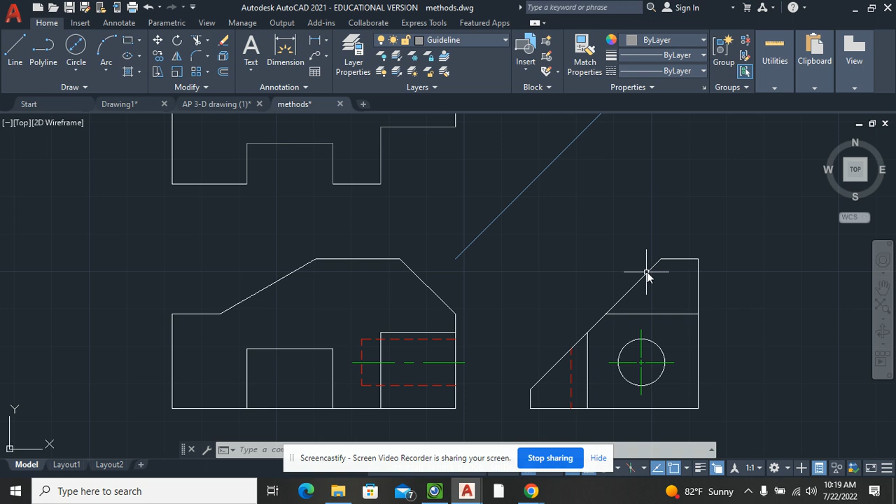Okay, we're going to draw the rod support. I'm going to start drawing a rectangle.

I just saw something after I looked here. It's actually 4.5 inches long. I was about to draw it wrong in the beginning because the holes are a half inch from the end. The holes are 3.5 inches apart, so it's 4.5 inches long and 2.5 inches tall.

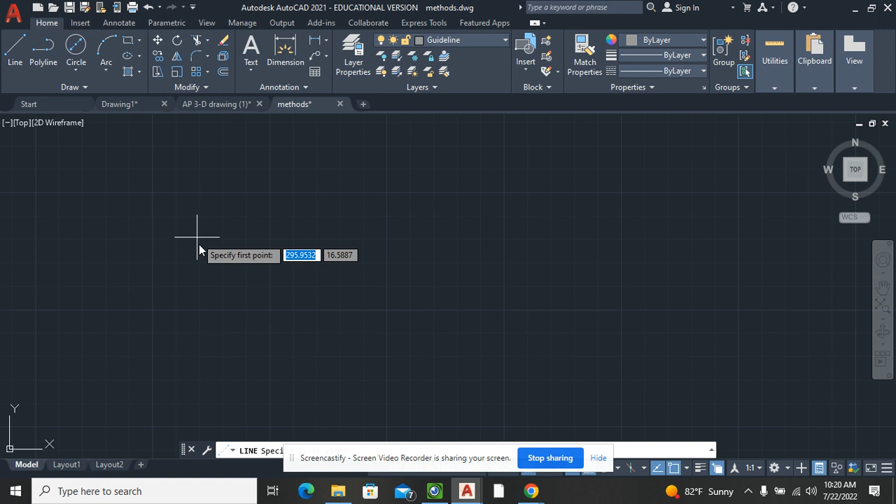So let's draw a line. 4.5, 2.5, 4.5, 4.5, and C for close.

I'm going to start on the right hand side of this. No, I'm not. I'm going to start on the left hand side. Let's start on the left hand side.

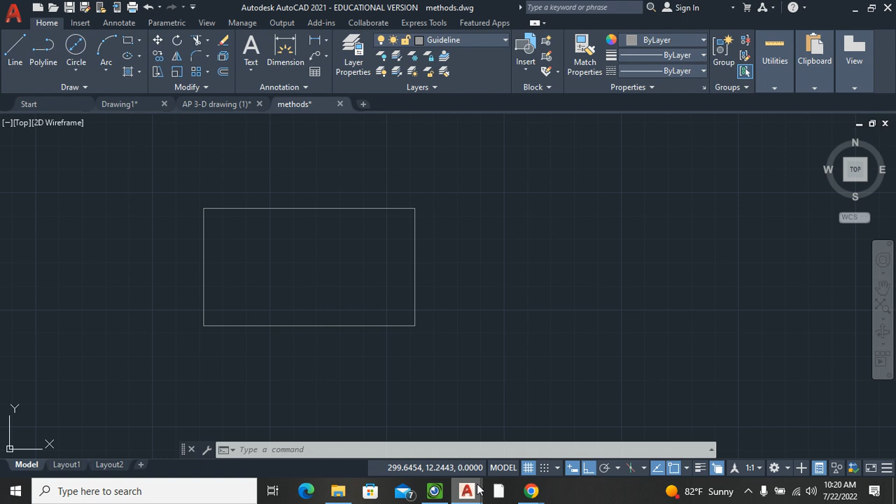We have a 3/8 line, or a line that's going to be 3/8 from the edge because it's got a 3/8, then a 45-degree angle. It's also a half inch tall. Our distance here will be made by starting in the center. So let's start at the center at the top.

This is one of them that wants you to start from all directions. So let's start at center to top. We're going to go a half inch, 3/4, and then down to a half inch from the bottom.

Half inch plus 3/4 will be 1.25 inches. And we're a half inch up. So let's start by offsetting the bottom edge of it. Offset 1/2.

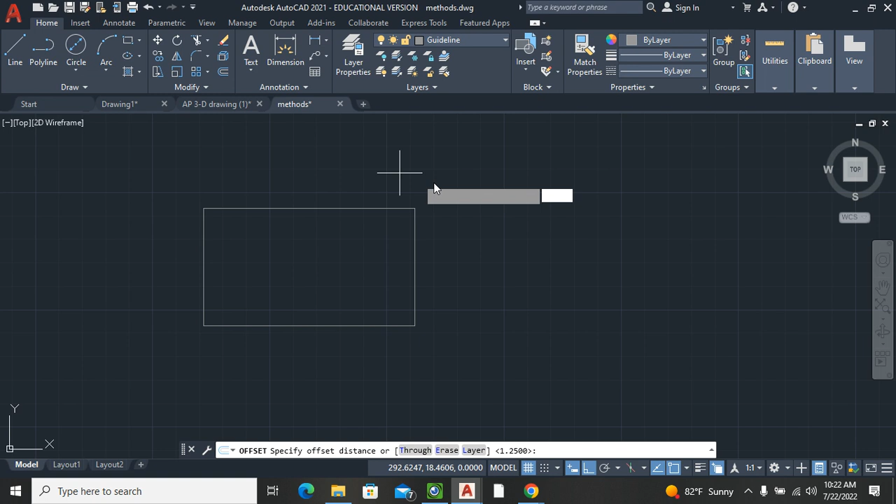I'm starting from the center at the top, and I'm going 1.25 inches, and come down to the. Actually, I can trim this off now.

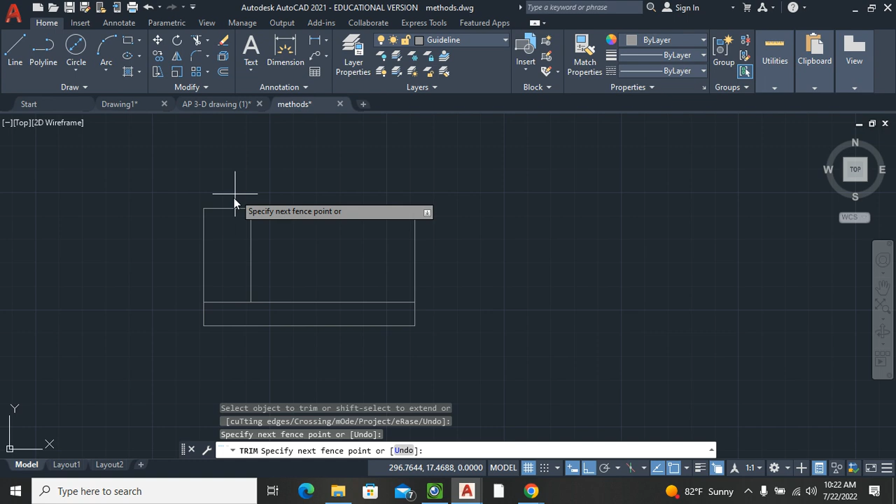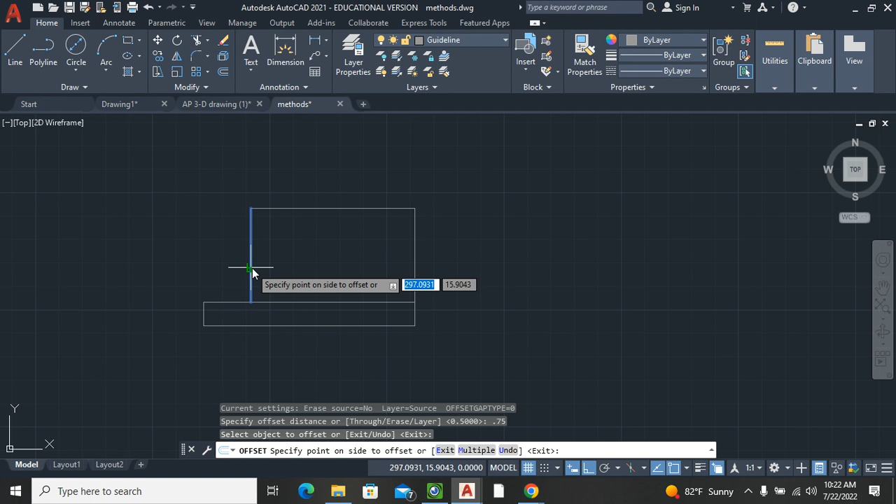It told us that that thickness was 3/4 inch here, so I'm going to offset this line 3/4. I'm going to go ahead and trim this off and this off, save me some confusion. This line does not come all the way down here.

Let's go back to our drawing so we see what I'm looking at. All right, from the center, we have a space here that's 1 3/8. If I convert that into an improper fraction, that is 11/8. To take half of that, I double the denominator, so it's 11/16.

So I can go up 11/16 from the center, over 11/16, and back down, and I have one side of it made.

If I'm drawing from my center, going up 11/16, I'm going this direction 11/16, and back down to perpendicular on the bottom.

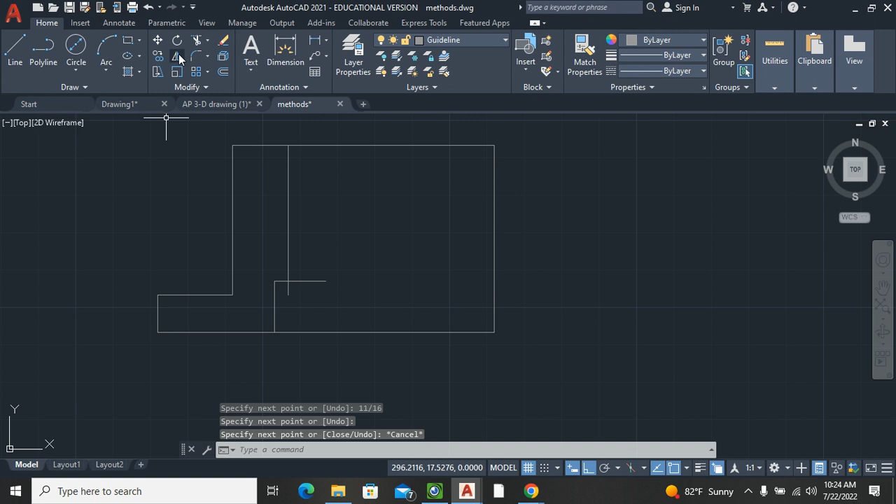Now I can trim this off because I know that's incorrect to be coming all the way down. It tells us that part is 1/2 inch, so I can offset this part that I just made by a half inch.

So I offset 0.5, and trim those two lines. And I have this made from the center.

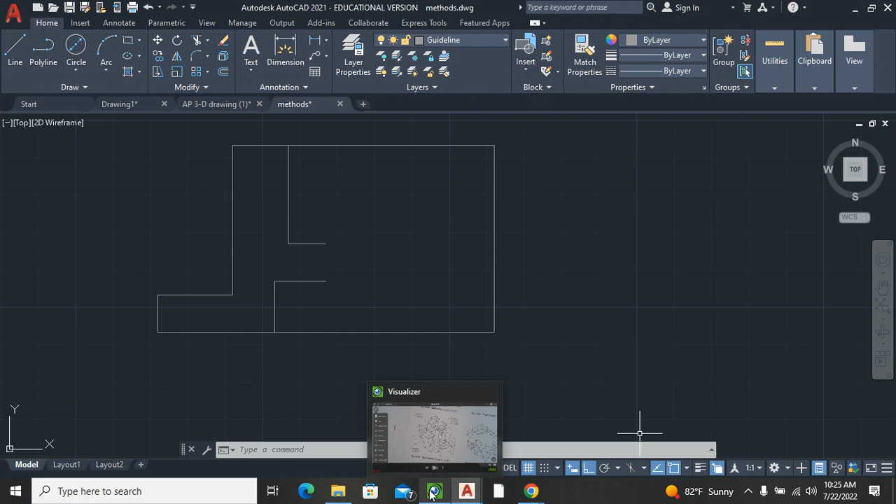Now what I have here, I can mirror. Let's go ahead and put, we said that we had a corner line over here. Let me go to my correct 3/8 from the edge. So let's put a line 3/8 from the edge, and then we'll calculate our drill holes.

Let's wait till on our drill holes. Let's just put that line on there next, and then we'll mirror this and start our side view. 3/8 from the edge. 3/8 from the edge. I'm going to put a line.

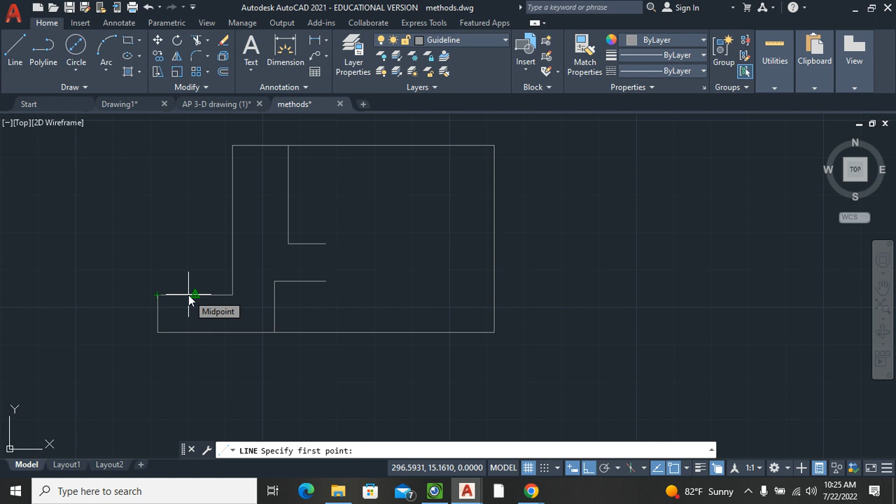And I'm just going to use offset to do that. 0.375. All right, all of this

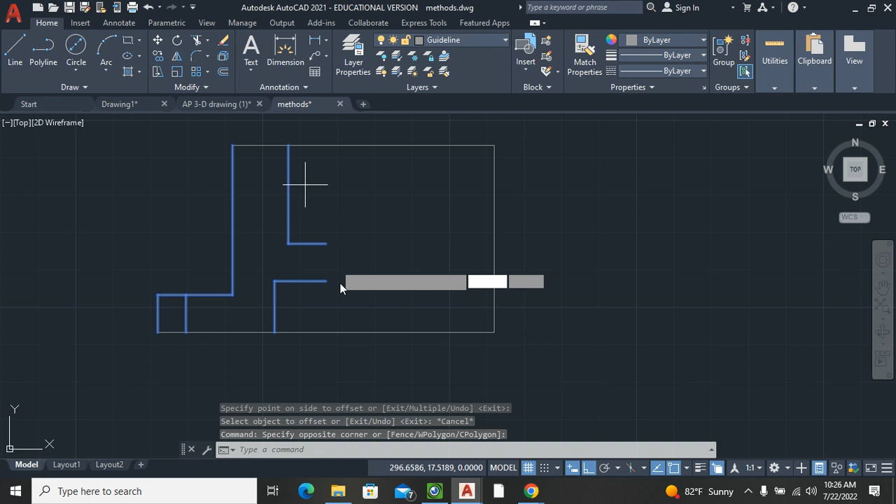I can mirror. And no, I do not want to erase source. Trim here at the top. And I'm going to trim this one off and leave that one because I need it for my miter line.

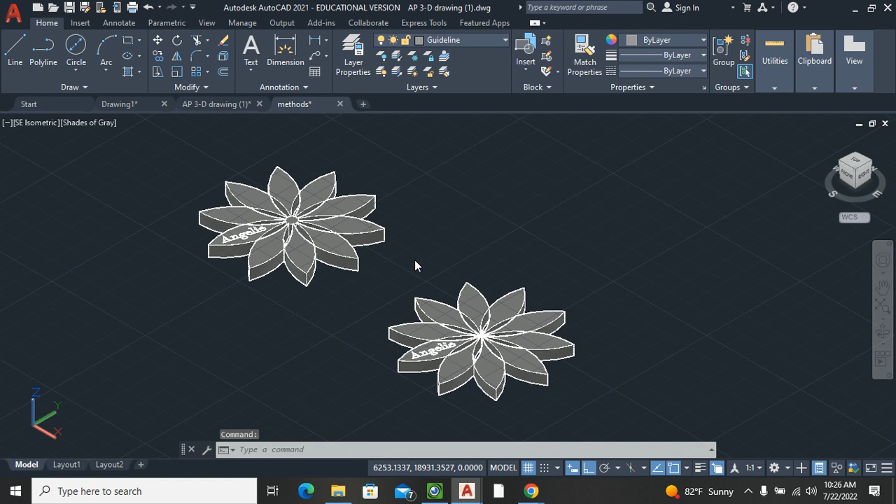All right, I'm going to offset this line. I'm just going to start with drawing a line 1 inch over. Let me look and see what my depth is.

My depth of this object is 1 1/4. And my height was 2.5. Start 1 inch over.

1.25, 2.5, 1.25, and close.

All right, that point we made here is in line with that one. I see something I'm going to change before I go any further. I'm on the wrong layer.

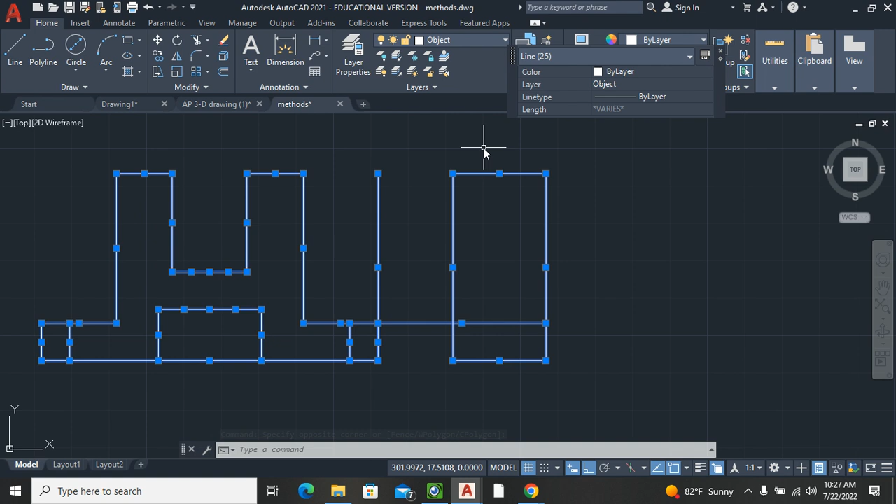And I can trim this off.

We have a drill hole that we can see on this side that is 1 13/16 up from the bottom.

That 5/8 tells me that it's centered this way, so I can start with a center line on the bottom and come up 1 13/16. So I'm just going to draw a line that gives me a point. 1-13/16.

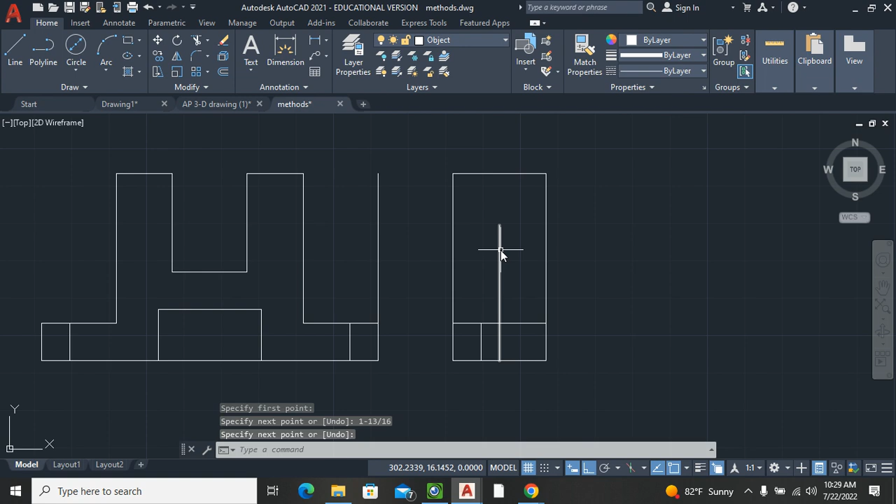And my drill hole size was a 1/2 inch drill, which would be a 1/2 inch diameter. And I can draw that 0.5.

Right, and this next thing I'm going to do throws a lot of students off. It has an arc on the top. Going back to what we learned on tangencies, this has a radius of 1 3/8.

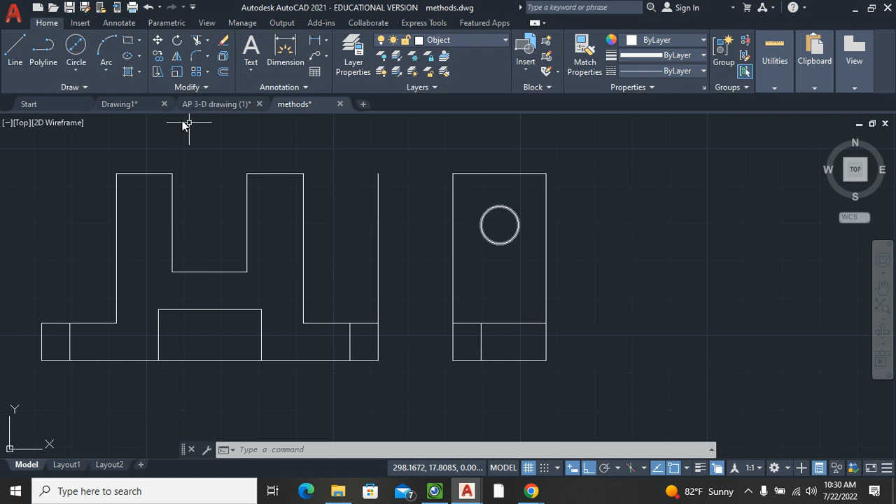That circle that's making that tangency is touching the very top edge. So it has to be 1 3/8. The center has to be 1 3/8 away from that top. So if I draw a line down from my center, 1.375, and now draw a circle with a radius

from that point, 1.375, there it is.

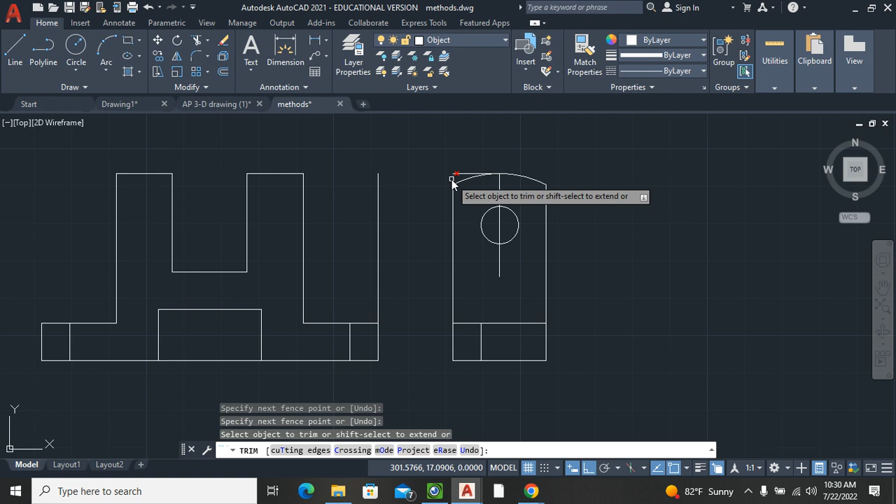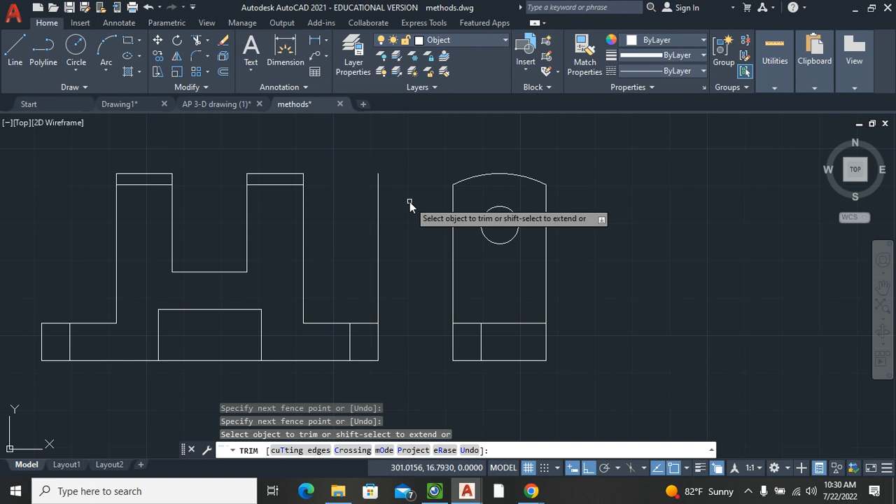All right, now we had points on this one that we didn't put in. So you actually have a line here that we didn't know where they were until we created this view over here.

Where is this and this represented over here? They would be represented by hidden lines. So I'm going to draw a hidden line there, and a hidden line from here.

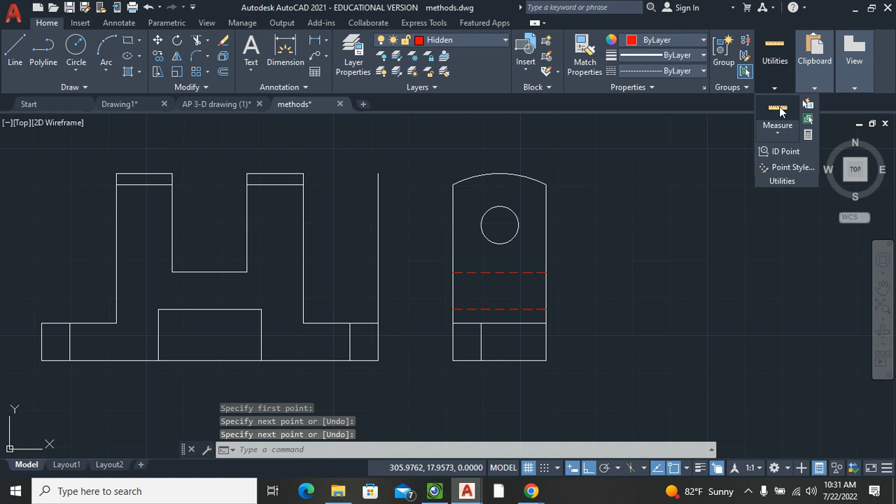I'm going to double check myself on that one, because it clicked on just what I thought it did. That one is incorrect. I'm going to have to draw the line all the way through and trim it because it clicked on endpoints - it was actually not in the right place. So let's trim that now.

And go back and check again. And it is a half inch. Correct. Again, I'm going to wait on those drill holes for now, wait till we do the top view. What else? Is anything else missing on that right now?

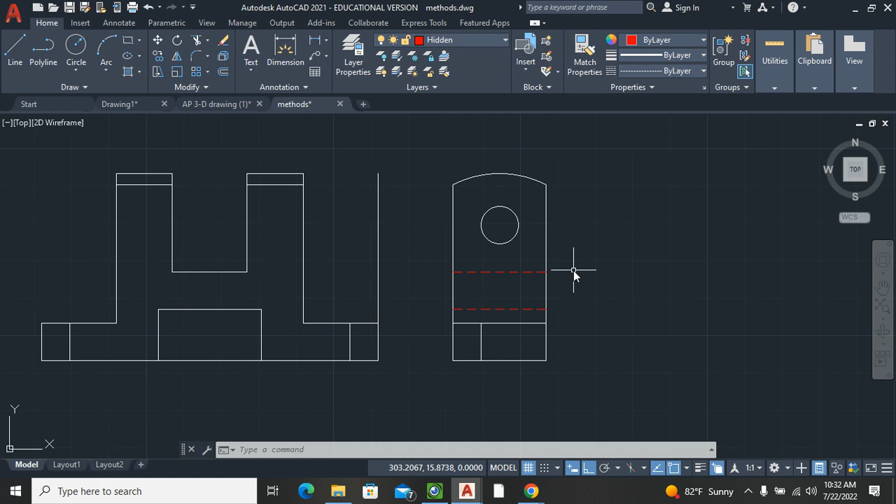Can't think of anything. All right, we're going to do our top view now. So we're going to draw a line starting from here. Let's do 10 inches at an angle of 45.

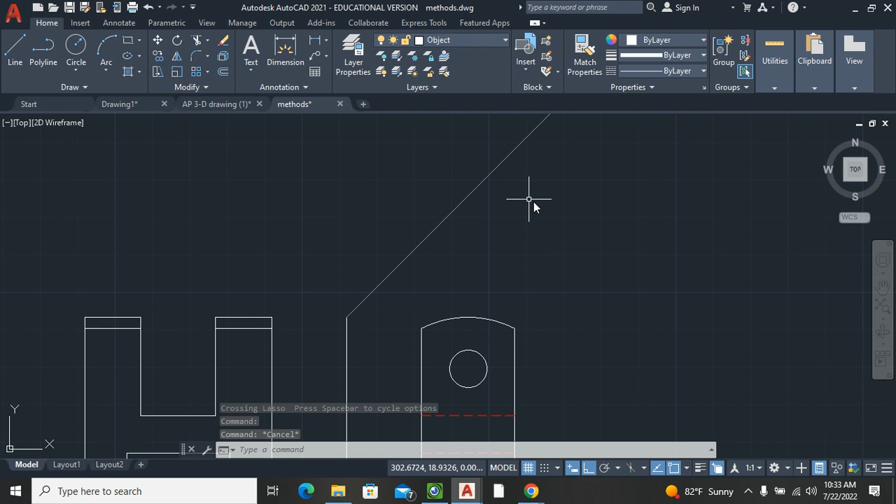And I'm going to change that to my guideline layer, just so I know it's not my object layer. I'm going to project up from my bottom or my front view, and I'm going to project from my side view.

Now I can transfer those here and here. I'm going to use fillet multiple - saves me a little bit of trimming by doing that. And then I will delete these two lines here. But that gives me my overall shape.

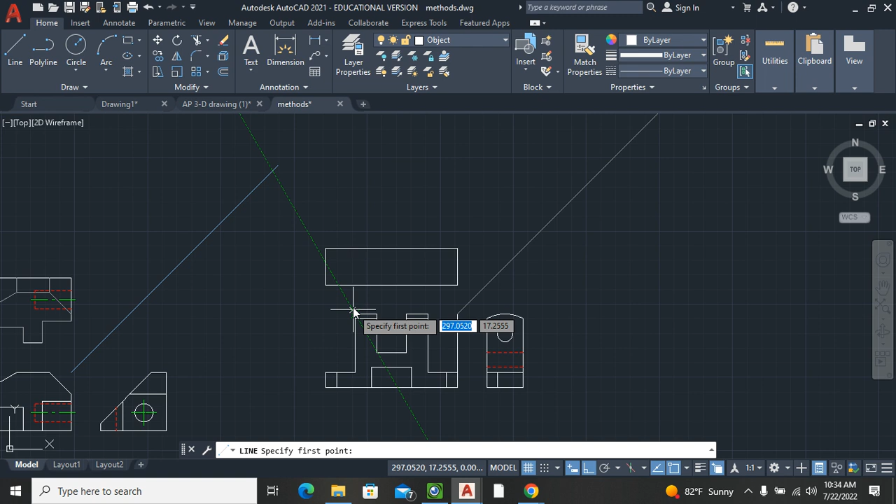I know that these two lines are going to go all the way across, so I can project those up. I said 2 lines, it's actually 4 lines.

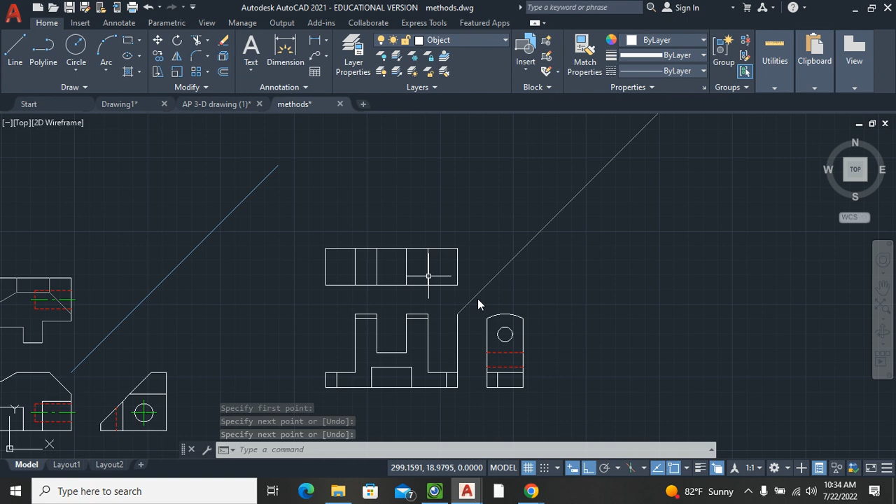I'm going to show you this next one two different ways. I can project up this corner. All right, I have the point on the corner.

I can draw my line now from there, 45 degrees in the direction of my cursor, which would be actually a 225. So I'm going to do it. Let's just say 0.75 at an angle of 225.

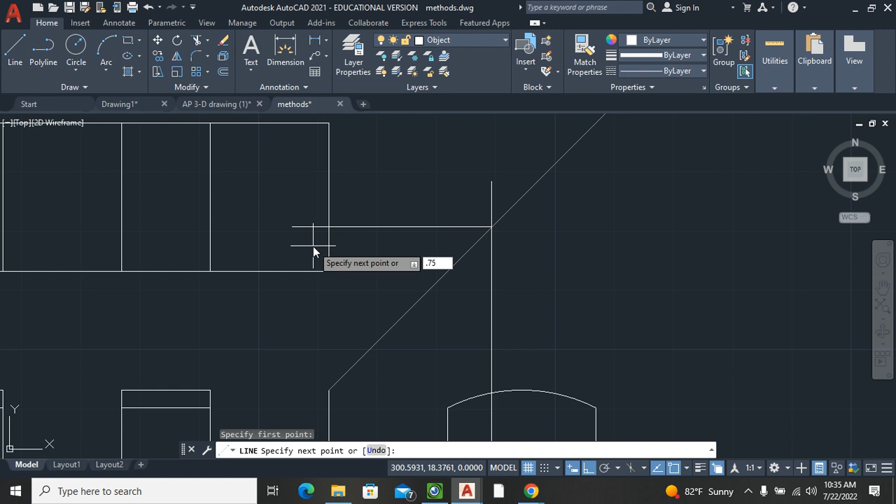Can delete that, trim. All right, I also can do this by, I could measure up - if I remember correctly, that's 3/8. So I go up 3/8, 0.375, enter, and I'm going in this direction this time, so it would be a negative 45. I'm going to do it, 0.75 at an angle of negative 45, and trim that off.

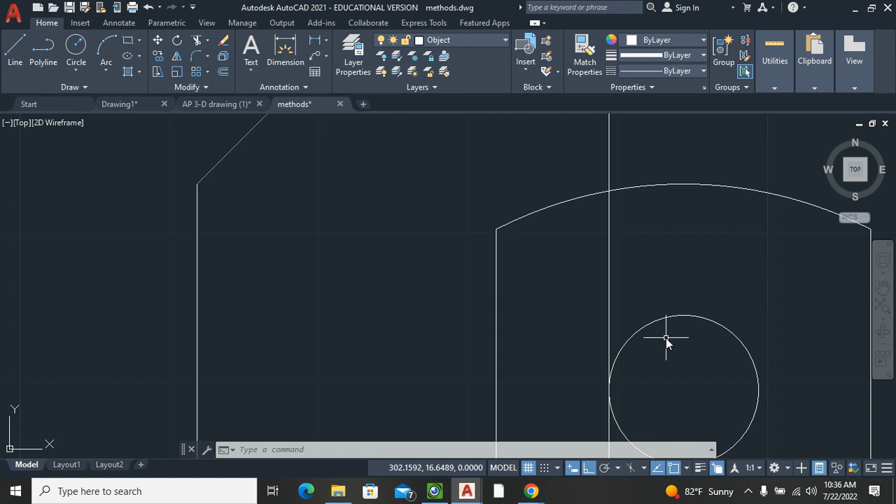I'm going to delete this line. I'm not sure whether those are in line with each other or not, so I'm not going to trust it. I'm going to project up here, project up here, and then I'm going to project from there this way.

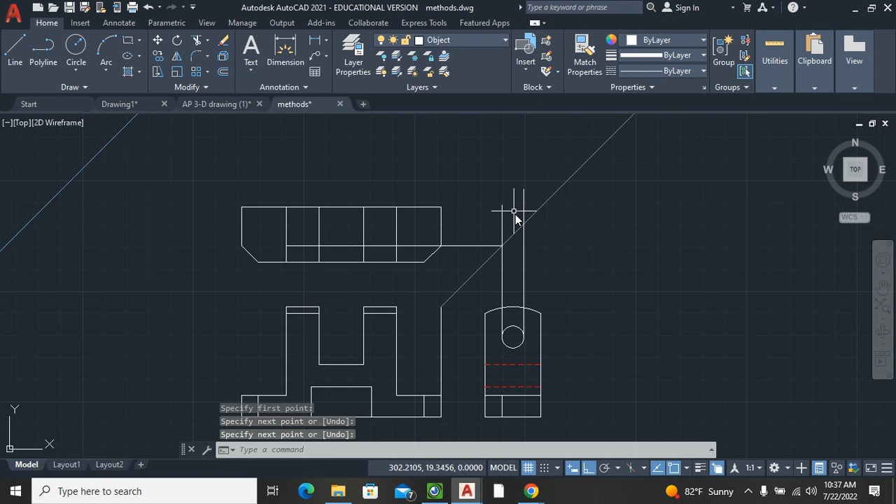That's showing me where my drill holes are passing through this part here. So I'm going to trim here and here. I'm deleting those now. I'm going to turn those into hidden lines.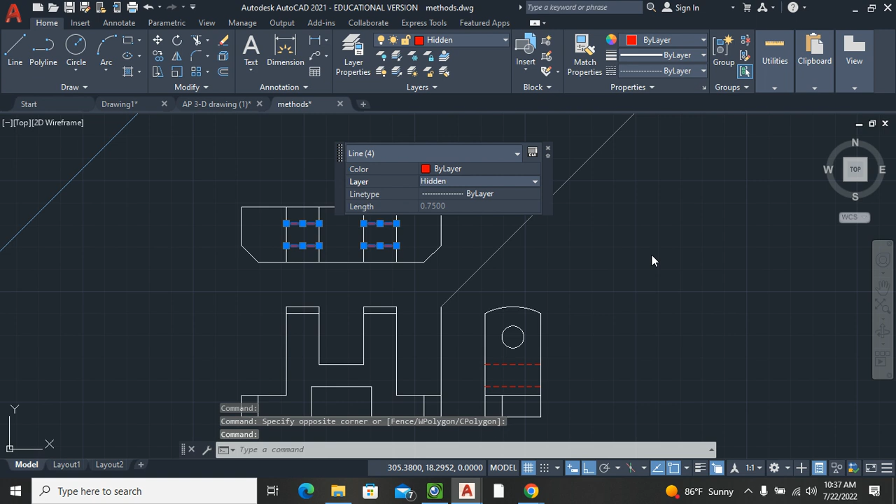All right, we also have drill holes on this surface here that I haven't shown on these others. So I'm going to - it's a half inch from the back.

You know, I hope I didn't mess up on this. This is 1 3/8, 1 9/16. Let me look at this. I need to measure. That's 1 9/16. That's correct.

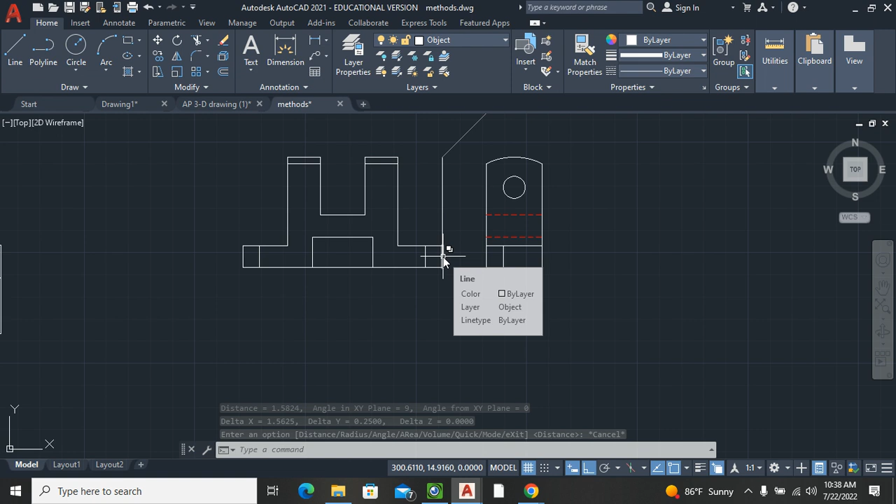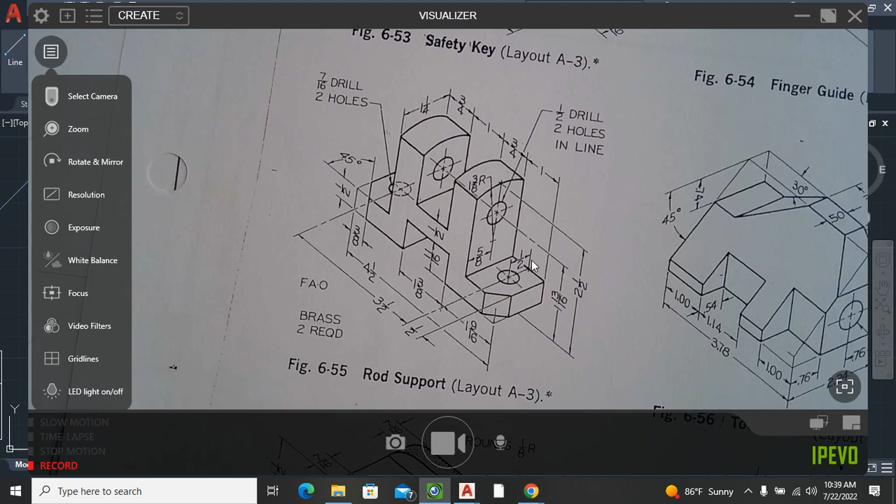Back where my - what was I looking at? How did I know? Those were 3 1/2, and that's a half. That's how I did that. All right, so it's a half inch from this edge and a half inch from the back, top edge or the back edge. So it's half inch this way and half inch this way.

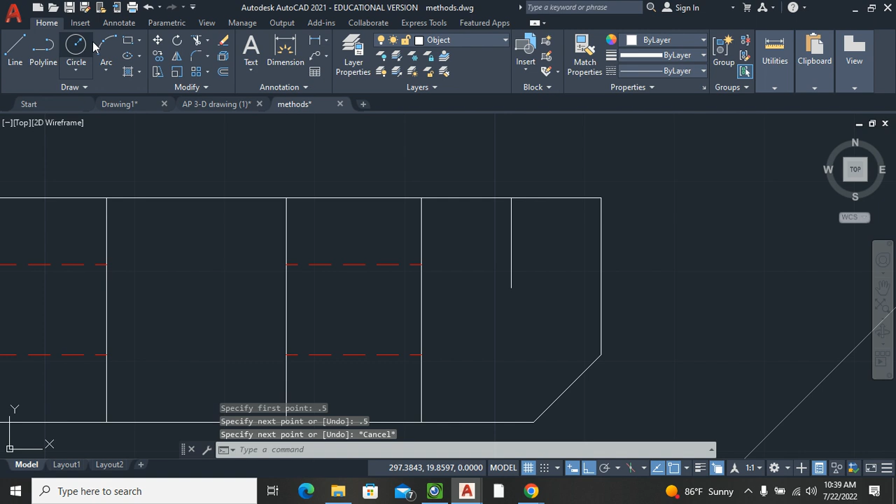So I'm going to draw a line half inch over, 0.5. And that drill hole is supposed to be 7/16, so I'm going to draw a drill hole 7/16, which would be a diameter of 7/16. 7/16th, enter.

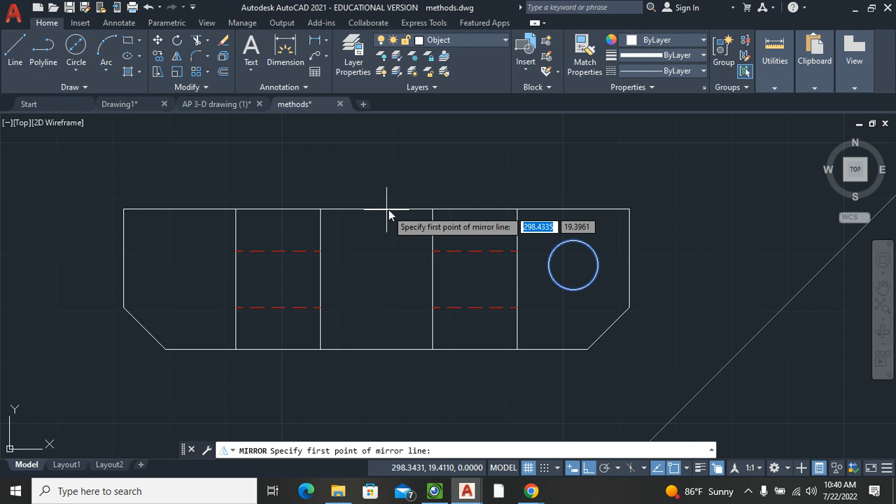Delete that line. I'm actually, rather than do all that again, I'm going to mirror that here. And then I'm going to turn my - all right, before I forget, I have some hidden lines missing on this view. I don't have this point represented up here.

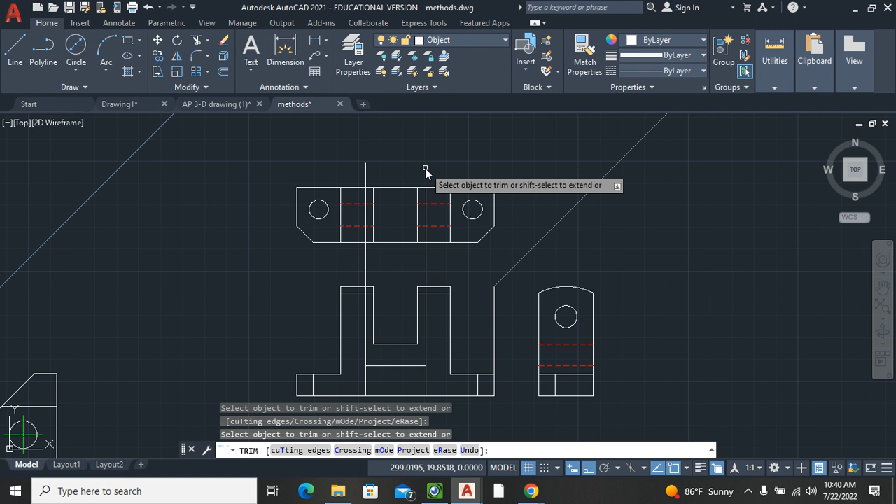So I'm going to draw a line up from here. Turn those off. And then delete that part. This and this would be lines.

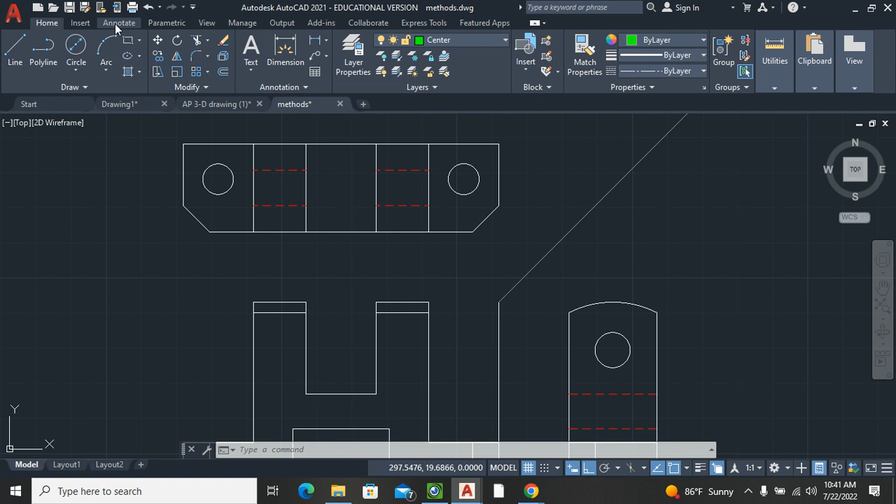I'm going to change my layer to center, go to annotate, center mark on this, and this. I'm going to use a center line on this and this, again on this and this, and again on this and this.

Now I've got to go back on this one. I do not have any of my hidden lines going this way or this way. I'm going back to my home tab, change my layer to hidden, project this point down, maybe.

It's not - let's just draw a line down, it's going to make it simpler. Draw a line from here down, draw a line from here down. And I'm going to trim.

I'm going to mirror - let's go ahead and put it. I'm going to go ahead and put my center line on that also, and I'm going to mirror it to the other side. I could project it all, but to me, that would be quicker to mirror, I think, if I can select the line.

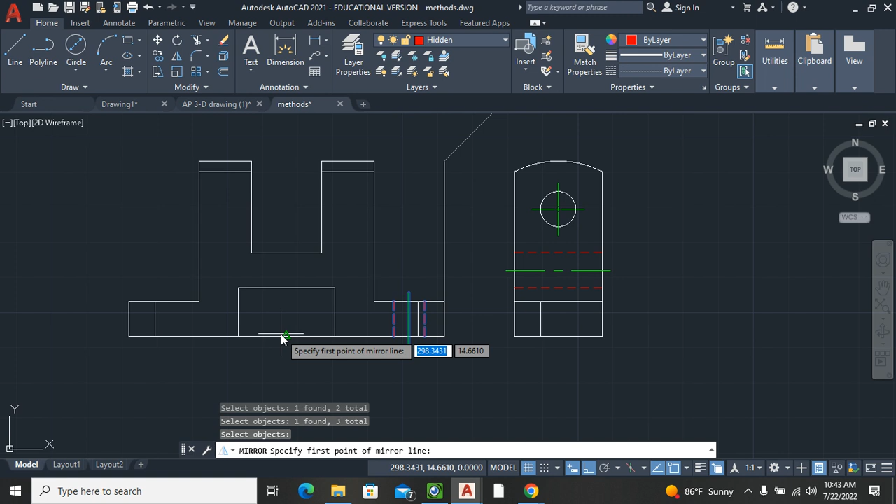Okay, now I also have hidden lines going this way. So I'm going to draw a line from here, here, and a line from here to here.

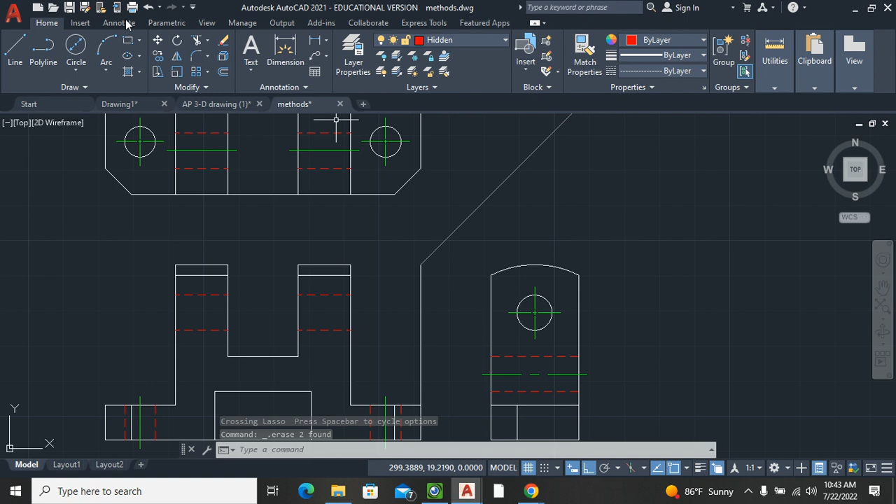Trim, trim, and delete. Use annotate, center line - it's going to be centered between those two. Center line between this one and this one.

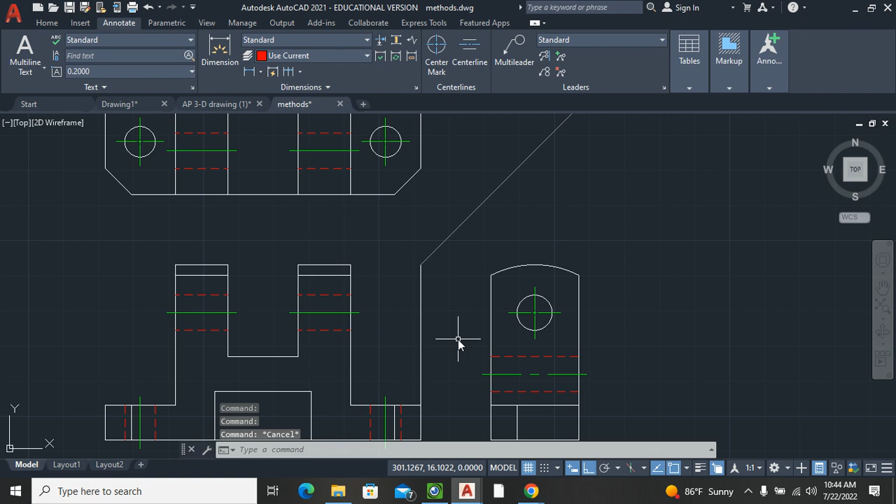And then I'm going to select those two and put them in my center layer. Trim, home, trim, trim that and that. And I see I have something missing. All right, let's go back on this one. I'm going to draw a line this way.

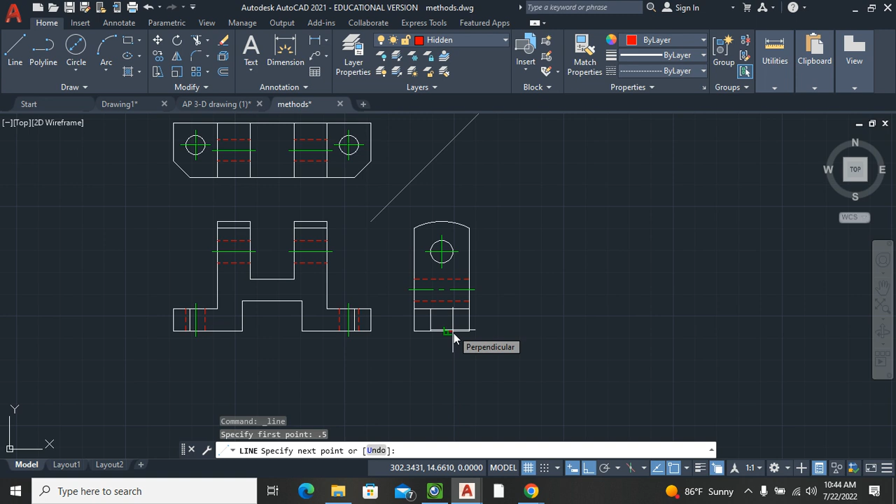It's 1/2, 0.5. I could actually have projected that down from the top. Let's do it again. 0.5, enter.

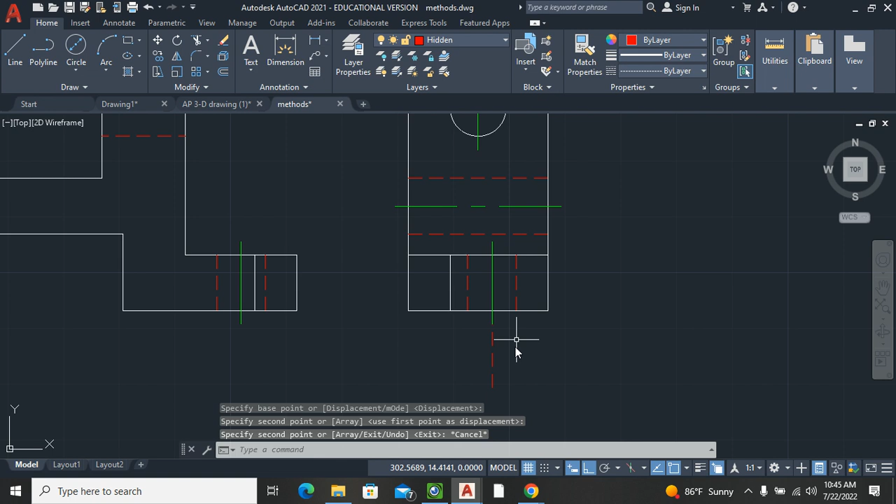I'm going to now copy those three lines from there to there. Just for checking, I'm going to project over here, and then I'm going to project down there. And that's hitting exactly where it's supposed to be hitting.

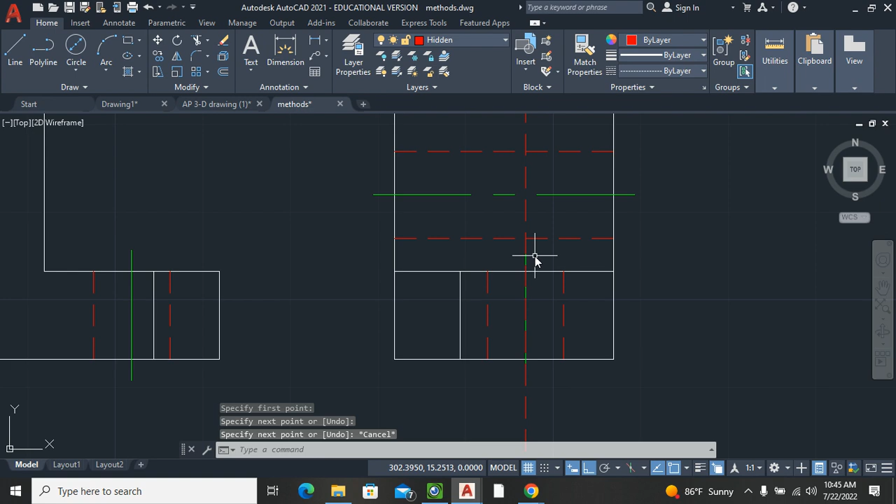I haven't forgotten something. That's how you draw rod support, figure 655.